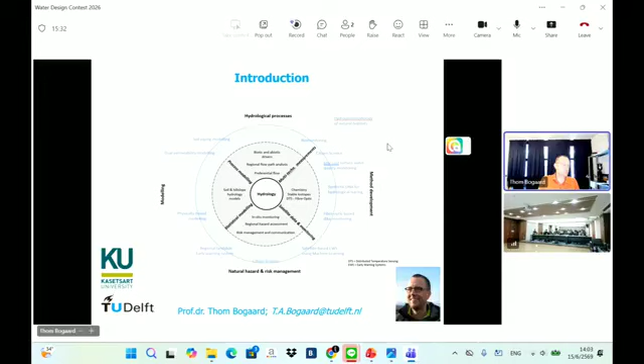Moreover, I've worked a lot on natural hazards and risk management and some hardcore hydrological modeling. The interesting thing of this CV is that you see it's really super interdisciplinary. You almost would not expect this type of CV at a university, but it's super nice if you then step into the world of nature-based solutions. I work at the TU Delft, the Delft University of Technology, in a civil engineering environment.

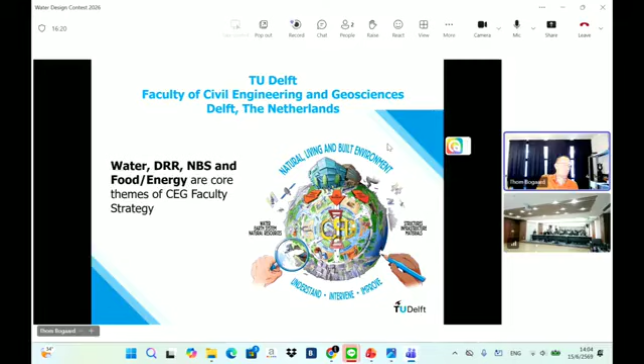And in this environment, what you see in the pictogram, our motto is we need to understand the system, but we also intervene if society needs it. That's what we all do. But we also would like to improve it. Maybe not only using concrete, maybe also having other more sustainable ways of managing the water cycle. And again, we do this in natural, living and built environments. So it can be in an urban environment, it can be in a rural environment. But it is the complexity which attracts us and where we work on.

Now, nature-based solutions for water resource management. And maybe I give a few words also on disaster risk reduction. As you see, I am so lucky that very often I can visit your country, go to different places in Thailand, and then discuss various aspects of the water management in Thailand. And I don't have to tell you, you have one of the more advanced but also complex water management systems. All the water that you have is used.

At the same time, you sometimes will have drought issues, and at the other moment, you maybe have too much water. And let's be honest, we also have sometimes too polluted water in the world. And all those aspects, too little, too much, or too polluted, we need to address. And nature-based solutions is a different way of thinking of water management that could help us with it.

Now, does that mean our infrastructure, like we have designed it, or how our predecessors designed it, is wrong? No, that's absolutely not the case. And here in one of the reports, coming also from Thailand, it says outdated gray infrastructure. And I honestly do not fully agree.

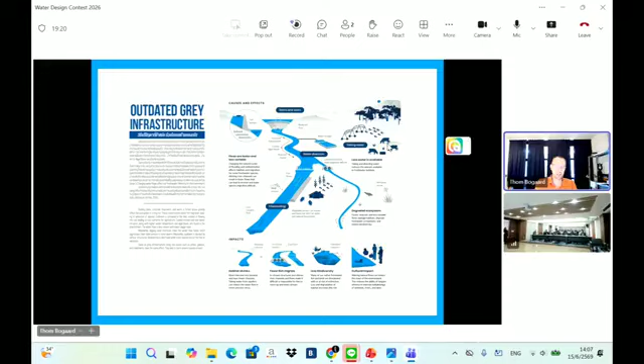However, what we did do wrong, or what we will do different now, is that the gray infrastructure is rigid. It has limited flexibility. Yes, you can open a weir, you can close a dam, you can play a little bit with the things we built. But a dam is not growing a bit higher or a bit lower automatically. A dike does not allow any natural movements anymore. So can we not do it a little bit less rigid? Would that be possible?

And here too, nature-based solutions are really a novel way of looking at the same problem. Now, at the same time, I use the word novel. Honestly, that's a little bit of a lie. Nature-based solutions exist in the whole world as long as I am alive already, and even before.

But after we as engineers have very long worked on controlling the natural system, nature-based solutions is basically the movement to giving back a little bit to nature and work with nature again. At the same time, those help solving some of our sustainable development goals. And of course, specifically things like 14, life below water, 6, clean water and sanitation, and definitely also the amount of food that we can produce, so zero hunger. And nowadays, my own hobby, also a bit more on how environment links to our general health and well-being.

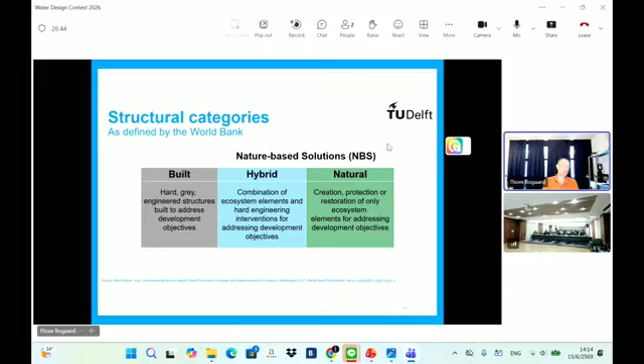Now, fully natural solutions could, for example, be protecting our coral reefs. Coral reefs, typically a few hundred meters away from our coastlines, are super important, absorbing some of the energy that you would otherwise get to your coast, and in this way protecting the coastline. In combination with a mangrove at the coast, you will have natural coastal protection in which you almost don't need any sea dike anymore, if maintained well. So that's a fully natural solution for coastal protection, for example.

Managed and hybrid solutions are the ones that cannot sustain themselves completely, and we have to help the environment a bit, or the environment helps the hard infrastructure a bit. In coastal terms, it could, for example, be a dike with a long flat plain in front of it, in which we make wetlands, salt marsh wetlands, to help us protect the dike, and in this way have a much more cost-efficient way of protecting the coastlines. The same you can have, for example, with mangroves. You can have them completely natural, but you can also have mangroves which have to be managed by us as society for the coastal protection.

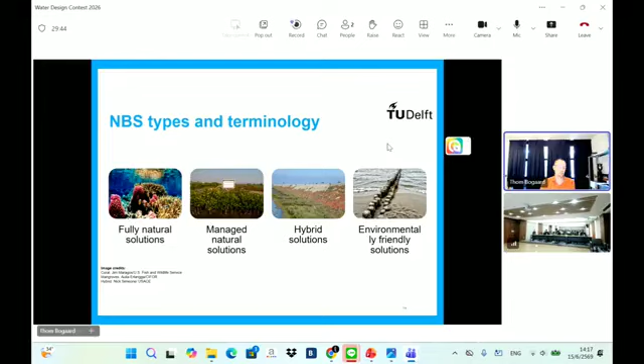Now, as I have, I think, all engineers in the room, let's go a little bit to basic ecological concepts. So, which concepts are we using if we are thinking of nature-based solutions? Let's start with what is ecology. Ecology is a word which comes from the ancient Greek, oikos, and it means house. It was introduced by Ernst Haeckel back in 1866. So that's more than 150 years, 160 years ago now. And it's the science that is concerned with the interactions of living organisms with each other and their environment.

And our colleague, Dr. Nisa Leksungkorn, she gave this beautiful slide to me, and it says, ecology is the study of the relationships with living organisms and their non-living environment, including the flow of energy and transfer of food through trophic levels. So what's important to understand is that nature-based solutions, they do not kill the relationships between organisms. We try to design a water management solution in a way that the relationships between organisms stay intact or even improve compared to the current situation.

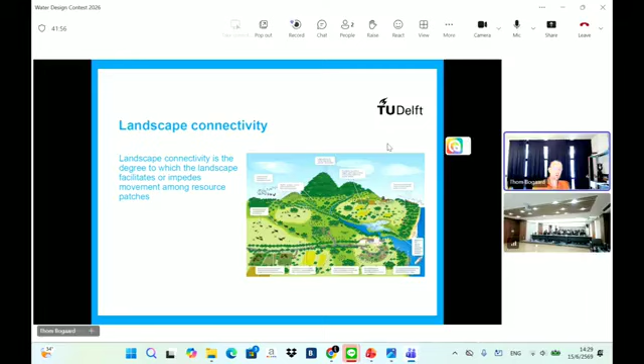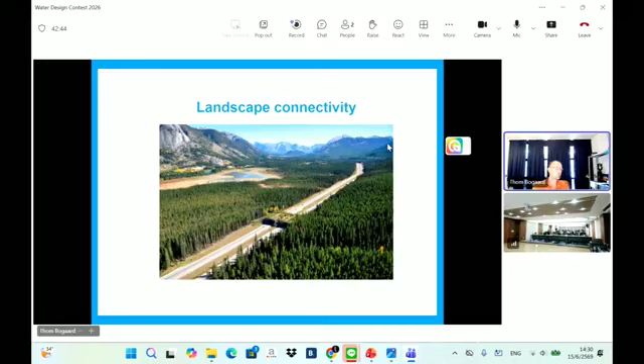So if you want your biodiversity to grow and to maintain and to survive, it needs to be able to be both in the forest and at the pond. Now here too, in ecosystems, we use the terminology connectivity, patches, and corridors. A patch is a place where an organism, let's say a tiger, can live. But the tiger cannot typically live in one patch, so it has to find a way to go from one location to the other. And normally there are already hurdles to be taken.

For example, swimming over a river. Now, it's not always possible for a tiger to swim over a river. And if we make it a straight line river with embankments with high flow velocity, it will never be able to swim across the river. If we have a natural river, the tiger will go from one area, it will swim a little bit, relax a bit on an island, and as stepping stones, basically swims to the other side and finds the partner, more food, maybe a bit to drink, or just more prey.

So as we as society and humans are really disconnecting natural systems, one of the things we as water management engineers could do is thinking of how our solution, how our flood protection, how our water storage, how our disaster risk reduction solutions could at the same time act as a stepping stone, for example, for the tiger. So those are called stepping stones, and they connect landscape areas. And corridors, of course, are the same, but it's a continuous area. It's only not super safe for the animal, so it really needs to cross it relatively quickly.

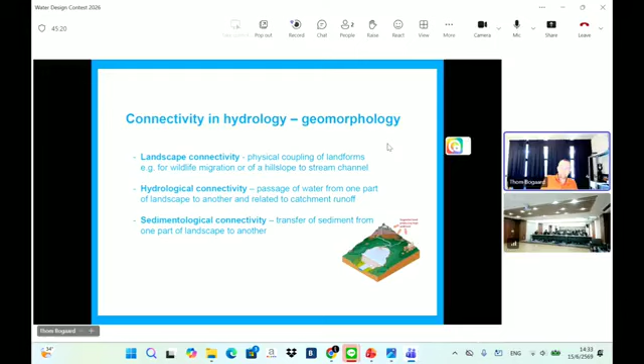So, if we have a landscape which is directly connected to the river, that means that some of the sediment will be in the river. That can have advantages and disadvantages, but there is a link between the hill slope and the river. If we make terraces, big areas of the landscape are not connected to the river anymore. Now, just as an example, what could happen then is that there is less sediment in the river and that

the whole ecosystem changes. At the same time, just to show the complexity, if the hill slopes are used by us, by humanity, for example, for agriculture, what you could see is that some of the pesticides and fertilizers that we apply to the field to have more crop yield will end up in the river. That's also not good. In that respect, it's then maybe preferable to disconnect the hill slope from the river.

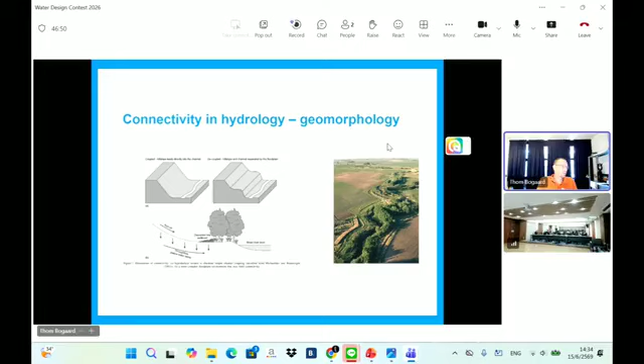In other cases, it could be useful to have the connection. So it depends a little bit on your local problems, whether the nature-based solution should facilitate connectivity or on purpose disconnect a little bit, for example, in case of pollution.

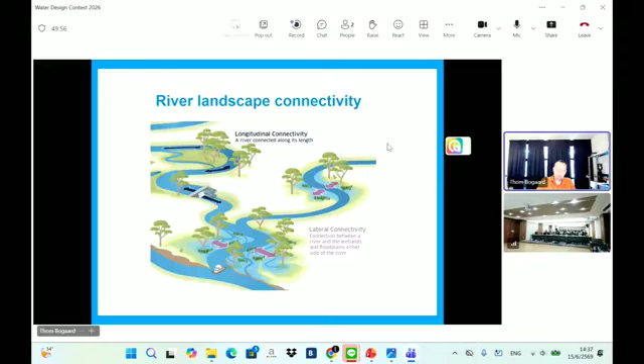Now let's skip this one for now. Now, why are people so incredibly enthusiastic, me included, about nature-based solutions? One of the things we really have learned is that nature, especially if we allow a certain level of complexity, is much more resilient. What is resilience? Resilience is that if you push an ecosystem a little bit to the left or the right, so basically if you put a bit of stress on the ecosystem, it will automatically adapt. A system is not resilient if you push it a little bit and it ends up in another new equilibrium state.

Now, a nice way maybe to show this is if we as humans get a virus, typically our body will start sweating a little bit and it will start fighting the virus. And at some point, you will recover from it. So you are then healthy, you are resilient. If you have a genetic difference, or if you are so unfortunate that your resilience, your own body health, is a bit less, then the virus could bring you from one state, that is, I'm alive, towards the other state, which is you're dead. That's of course not what we like. We would like to have a system in which we survive. So the more resilient you are, the more shocks you can absorb and, within a certain time frame, come back to the same steady state system.

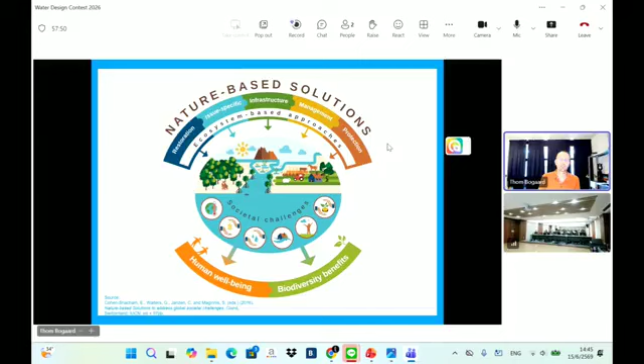So it requires careful evaluation, planning, and design of project components together with all stakeholders. So it means that you as the next generation of water managers and engineers have to work differently than when I was a student. When I was a student, I could design a solution, and almost automatically society adopted it and we built it. We just built the dike, the dam, a reservoir, added a few pipes. We could do that relatively independently; as long as the local policymakers agreed, we were happy.